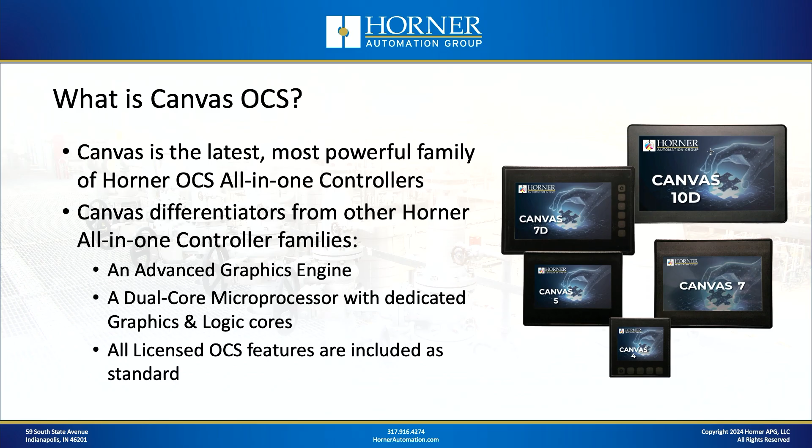Also, Canvas includes a lot of other features that might be available in other series, but you have to pay extra for those through a one-time upgrade, whereas they come included or pre-licensed in Canvas. So lots of additional features, and we're going to talk about those as we go. Okay, so why might you upgrade to Canvas? Well, first of all, it's priced very comparably to the original XL series and also to XL Prime. So you're not making a huge financial investment to upgrade to the latest and greatest.

Also, the basic upgrade procedure, which we're going to demonstrate for you today, is quite simple and really it's pretty low risk. Okay, there's testing involved, of course. You always test anytime you make changes in your machine logic. However, it is a quite simple process and we think you'll consider it pretty low risk. Also, the other reasons to upgrade are some of those included features. The superior graphics tools, the best graphics we offer in any OCS. If you're an IEC user, we have some enhancements to IEC that you could take advantage of. We'll talk about those a little bit later.

If you have never used WebMI and you want to take advantage of it, WebMI capability is built right into Canvas. If you happen to be an Ignition user or another user of software which interfaces with MQTT Sparkplug, which is kind of the latest industrial push protocol, Canvas has that protocol included. And maybe if you want to push data to the Horner cloud, Canvas supports that as well, having the ability to push to the OCS 360 cloud service built in, although you will still have to subscribe to one of the data plans with OCS 360.

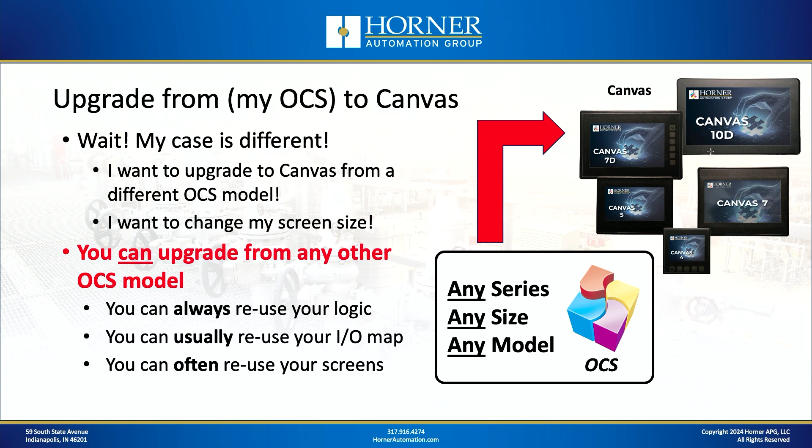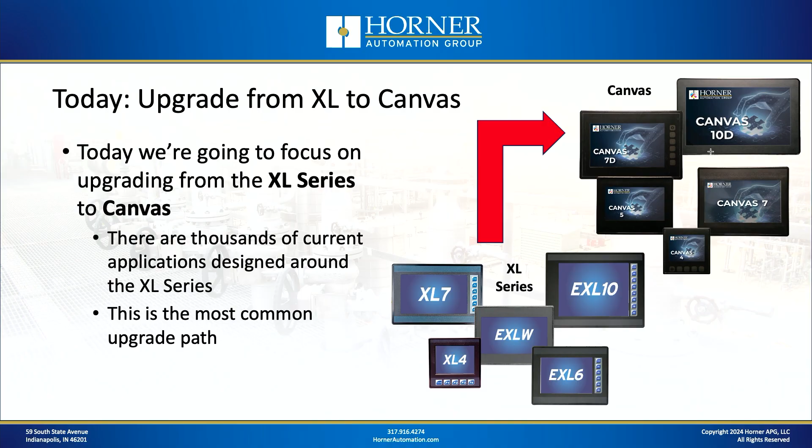So at Horner, we pride ourselves in giving our customers upgrade options, whether your machine is 5 years old or 25 years old. Okay, let's get back refocused on today's procedure, and that is upgrading from the XL series to Canvas. All right, the first step is to select a model.

Now on the left there, I'm showing you the most common models in the XL series: the XL4, EXL6, EXLW, XL7, and EXL10, all right? And on the right, I'm showing you the closest matches for those models in the Canvas series. Now you'll notice that 3 of them have really a direct correlation, a direct match. The sizes are the same, the pixel patterns are the same. So that's the XL4 to the Canvas 4, EXLW to the Canvas 7, and XL7 to the Canvas 7D.

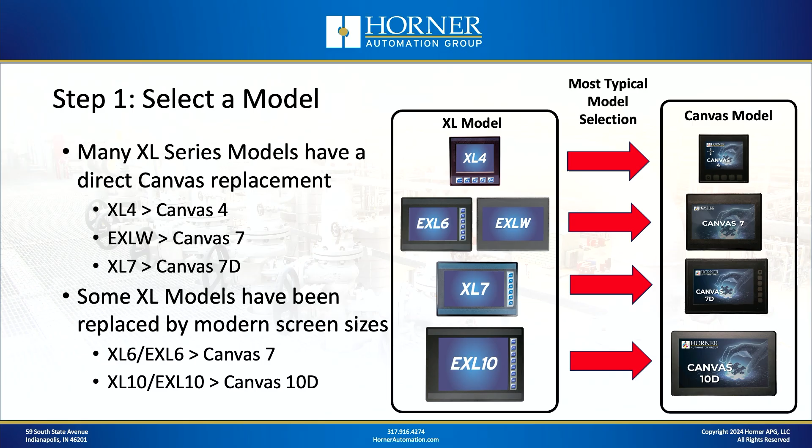And a couple of the models in the XL series don't have a direct representation, and that's because we've replaced the EXL6, for instance, with a traditional 7-inch model. And we've replaced the EXL10 with the Canvas 10D, which is a 10-inch unit, but it's widescreen with a different pixel pattern. Okay, now those, you can still overcome the fact that the pixels don't match exactly. We'll show you how that happens.

Okay, the next step is always to back up your file, right? The Cscape file you have that's running on your existing machine, you always want to make a copy of that before you start the upgrade procedure, always, okay? And then when you open that file in Cscape 10, you'll probably be prompted to back it up again, just because we think it's really important that you do that step. Always want to make sure you have options to go backwards if necessary, and that means having a secure original file.

Okay, the next step, because technically I guess this is step 3, but it's the first step within Cscape, is that you're going to just go to the hardware configuration and change from your current model over to the Canvas model. Okay, so you'll change series from, in this case, XL or XL Prime to Canvas, and then you'll go and select the size that you want.

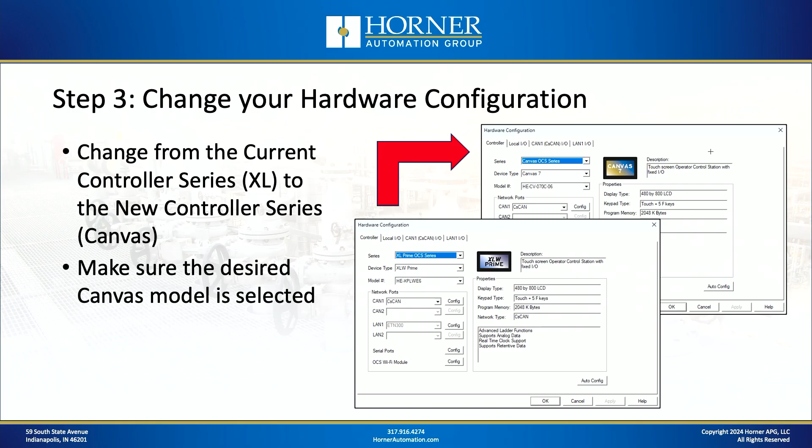Now, Cscape 10 will automatically select the direct replacement size if there is a direct replacement. If there isn't, for instance, going from an EXL6 to a Canvas 7, then you'll manually have to select the size and the device type in your hardware configuration.

Okay, now once you've done that, if you don't have a pixel for pixel match between your original XL unit and your Canvas unit, you will be prompted to basically tell Cscape if you want it to resize and reposition the objects on your screens. Okay, and generally I would say yes, you're usually going to be better off opting in for that. Otherwise, you probably will want to go through and manually change everything. And I would suggest allow Cscape to do its job, and then we can do some tweaking later. So once the conversion has been done, if it was needed, then we can do some tweaking.

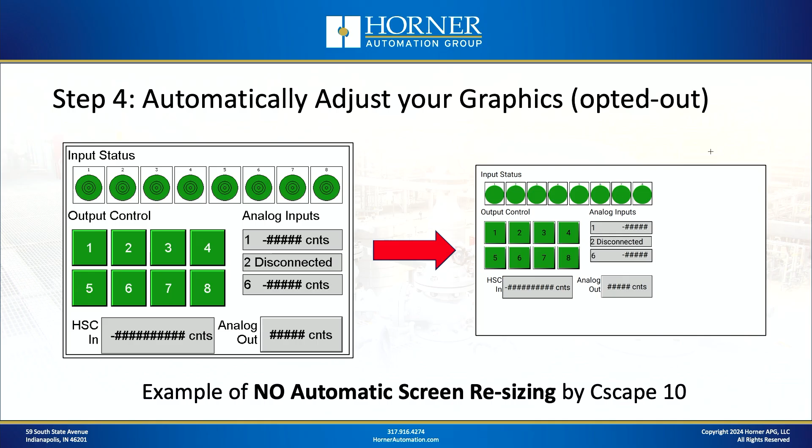Now, this is what things look like if you opt out of the conversion. On the left, I'm showing basically an EXL10 screen, and on the right I'm showing a Canvas 10D screen. And you can see there's a lot of white space there. That's because we didn't automatically resize and reposition. However, if we would have chosen the resize option by opting in, then you can see that things fill the screen, and while there's some tweaking that needs to be done, it looks pretty good.

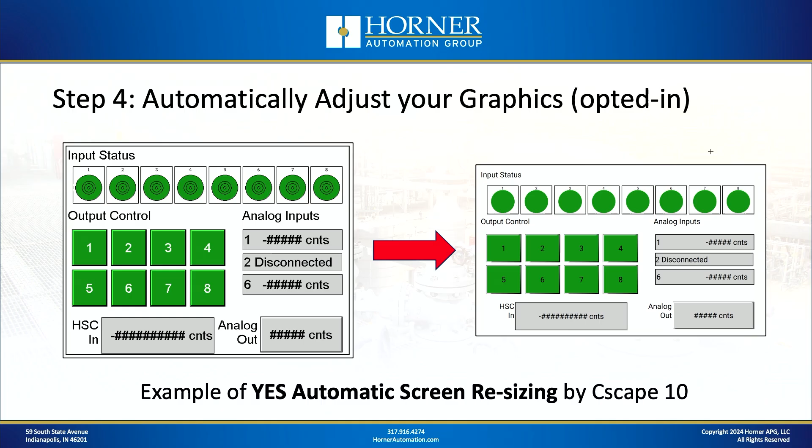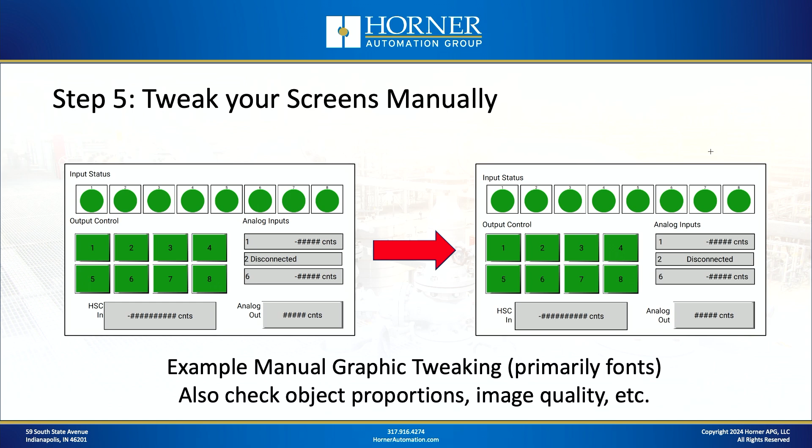And then on the next screen, I'm showing you the next step, which is to go through and tweak your screens manually. So for things that didn't exactly translate perfectly, you'll want to go through and just tweak things a little bit. It's only going to take you, on average, a minute or 2 per screen.

Now we get into the optional steps. So at this stage, we're pretty much done. If all you want to do is a basic conversion from XL Series over to Canvas, you are pretty much done. The next things we're going to talk about are all the different optional steps you can take if you choose, all right? The first one is to switch from register-based to variable-based advanced ladder.

Okay, if your program is already register-based and you're interested in converting it to variable-based, you can do that. Cscape 10 has a conversion option included inside the Project Navigator menu. So we're going to demonstrate that today. So you don't have to start from scratch if you want to go from register-based to variable-based.

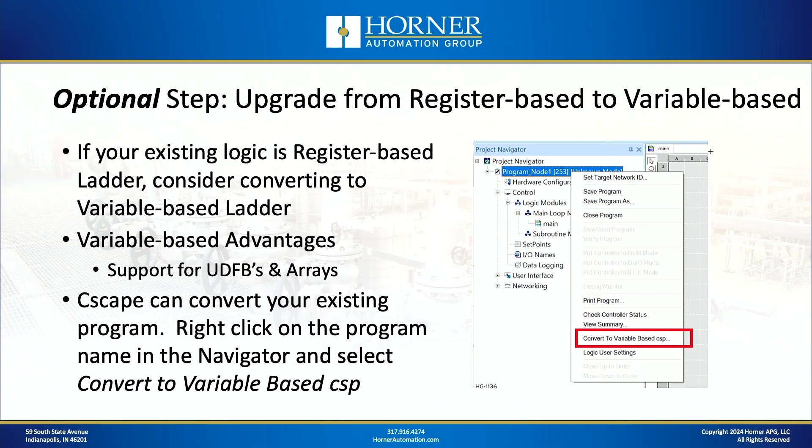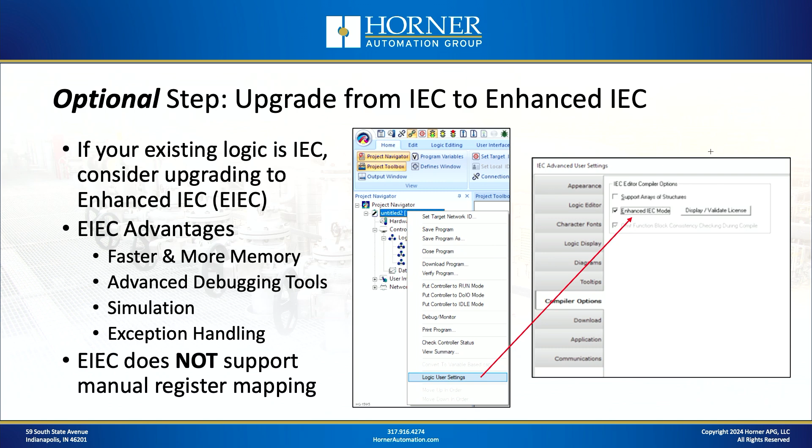The one thing to keep in mind is, if you've got an IEC program that's doing a lot of manual register mapping, that is not supported in Enhanced IEC. So you'll have to make program changes to overcome that manual memory mapping that you might be doing to do some programming shortcuts. So that's one little caveat I wanted to mention. So another optional upgrade there.

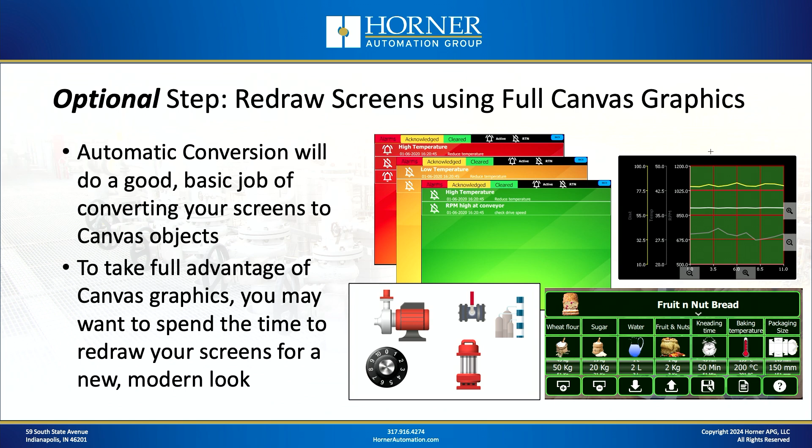Okay, another optional step is to fully take advantage of Canvas graphics by redrawing some of your screens, utilizing the advanced graphics capability with Canvas. That's a little more of an investment, right, to redraw your screens, but maybe it's not. Maybe you don't have that many screens, or maybe it's really important that you have a more modern look to your machine, so you're going to spend the effort to go ahead and redraw the screens. But at least, even though you're redrawing your screens, you're starting with your logic, which is a big deal.

The next optional step is to take advantage of WebMI. Maybe you didn't have the option of doing WebMI before with your XL Series product. If it's one of the original XL Series, that's absolutely true. And now you can use WebMI, all right? And it's included for free, right? So you can have full remote monitoring and remote control and take advantage of the WebMI license that's built right into Canvas.

The next optional step is using MQTT Sparkplug. And the reason you'd want to do that is if you happen to be using some industrial software that supports the ability to push data to that software via MQTT Sparkplug. And that, again, is a protocol that's built right into the Canvas OCS.

And then finally, taking advantage of OCS 360, okay? So with OCS 360, you can push data to the cloud, creating dashboards, alarms, and notifications. You can log that data for future use, whether it's AI, machine learning, or something of that nature in the future. And we're getting ready here later in 2025, actually this summer, to add remote access capability to OCS 360 as well. So you can remotely access your OCSs from Cscape to do troubleshooting and program changes and those sorts of things.

Now, even though support for OCS 360 is built into Canvas, you'll still have to subscribe to a data plan for each Canvas unit that you're going to use, and those start at $250 per year for 250 variables per minute. Quite a bit of data there. Next, we're going to demonstrate for you what an upgrade might look like from XL Series to Canvas.

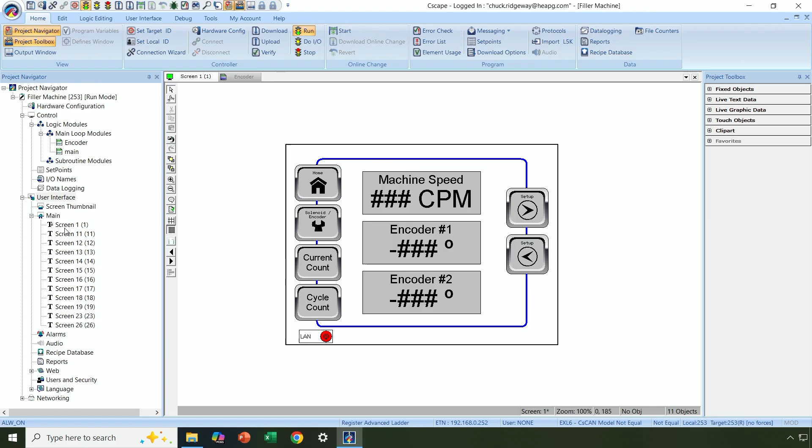Okay. So here's my program. You can see there are about a dozen screens or so that are part of this program, and there are a couple of logic routines as well. And you can also tell that it has been written in register-based logic.

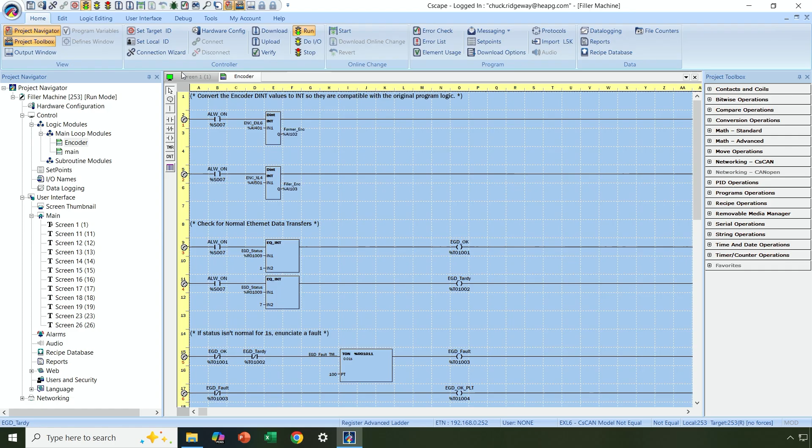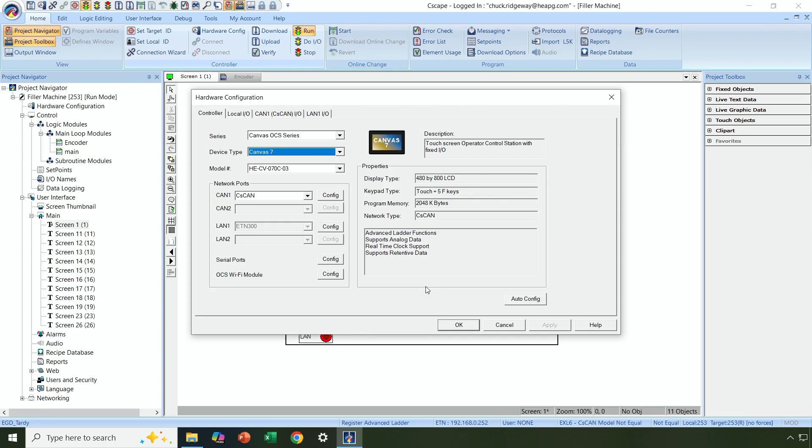All right, so the first thing we're going to do is upgrade to Canvas by changing the hardware configuration. So I go to hardware configuration. You can see it's on XL OCS series right now. We're going to switch this to Canvas. Now, after we switch to Canvas, the next step is to select the appropriate size that we want. The most direct conversion for the EXL6, which was a 640 by 480 5.7-inch display, would probably be the 7-inch model, or the Canvas 7. And we'll go ahead and select that. We'll hit OK.

So the next question that comes up is, do you want to resize and reposition the objects and their fonts proportionately? Yes or no? So this is where you decide, do I want it to resize things for me or not? I'm going to go ahead and say yes here. All right. And that's done.

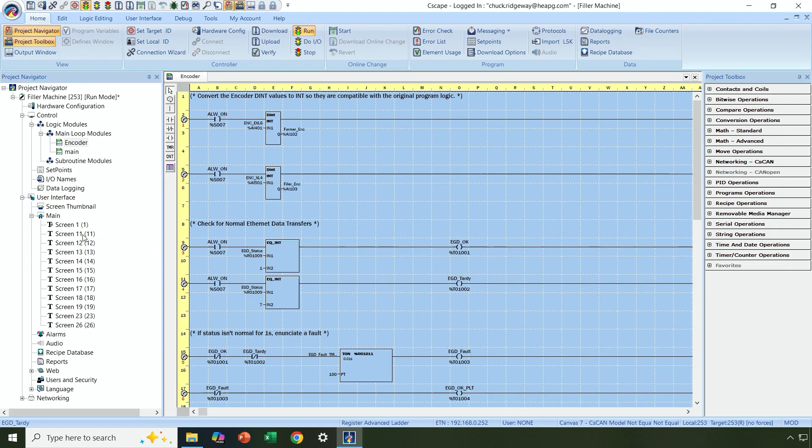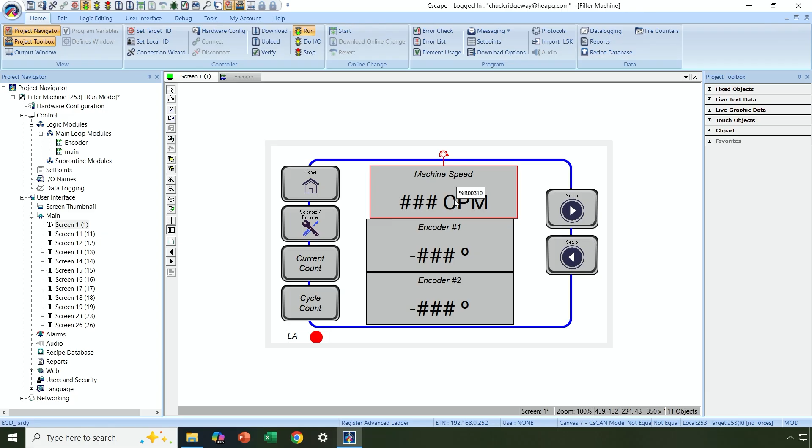Okay, and let's fix this one. All right, and let's fix this one. And I'll go ahead and stretch this one a little bit. All right, so that's much better. Now let's get them lined up here. All right, we're a little off on our sizing, probably because the grid settings were different on the last unit.

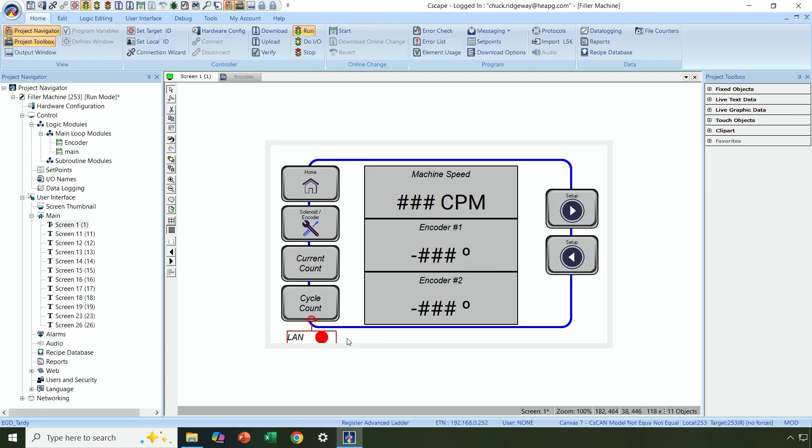So this is really just tweaking. It's not difficult, just a little bit of tweaking that you may need to do on some of your objects. And then this particular indicator here, the LAN part is cut off. So we needed to tweak that around a bit as well. So, you know, that took me a couple minutes to go through. Let's go to the next screen.

The next screen actually looks pretty good. We could choose to make that font bigger if we'd like. Again, we're going to have this LAN indicator on every screen, so that'll be something we'll want to change on every screen. But as you can see, it pretty much gets most of it right at the beginning. It's really just a matter of tweaking to get things to look just the way you want. And of course, we're not taking advantage of Canvas graphics here. We're just directly converting over to really basic data objects and those sorts of things.

So over the process of tweaking these screens, I would guess that on this project, and I'm not going to record the whole thing, it'll probably take me 15 minutes or so to go through and just clean things up so they look pretty decent for these dozen or so screens. So maybe a minute or so per screen. And that's pretty typical, I would say, for most conversions, maybe a minute or two per screen to clean things up. Okay, so the basic conversion is now done.

So we've taken our program, which was originally developed for an EXL6, and we've converted it over to a Canvas 7. It basically converted everything pretty much automatically. Of course, we had plenty of tweaking to do with the screens, which I demonstrated as well. Now, if we wish, there's lots of other upgrades we could perform. One would be to convert from register-based logic to variable-based logic. Well, how would we do that? We've got a whole video on that, but I'll at least show you the basics.

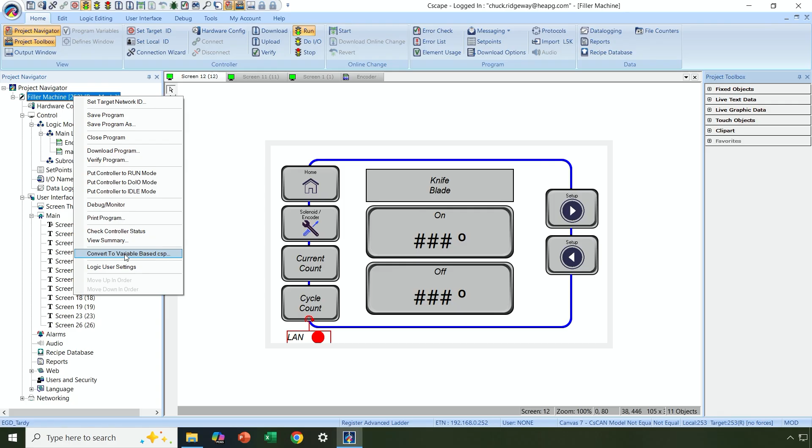So we're going to highlight in the navigator our program at the top level here. Right click, and down here we have convert to variable based. Press the start button. It asks for a name. So let's call this filler machine. It suggests a name. Filler machine VBAL is what I'm going to call this. I'll hit save. So it automatically saves it to a new name. And as you can see on the screen, it shows us its progress.

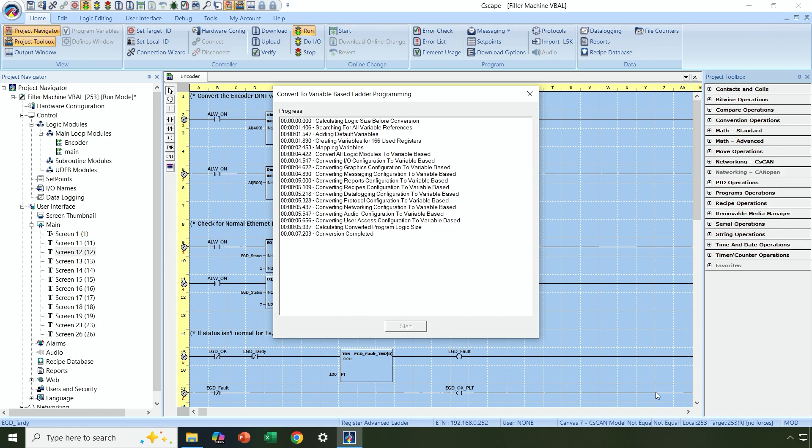Okay, and it tells us what the logic size was before and what the logic size was after. The big difference is it's created variable names, and that's now part of the program, so it's increased the program size. But there's still plenty of open space in the program.

Okay, so now if we look at this ladder logic here, you can see it's now variable based. Any registers which had IO names to them, their new variable name is whatever the IO name was. And if you didn't label the specific variable, you just left it as a register, then you're going to get kind of standardized variable names.

Let's take a quick look at that right now. I'm going to pull up the program variable table, the global variable table. As we scroll down here, you can see all these traditional variable names. But then when we go a little further, we can see for any variable that was not documented, that didn't have a corresponding IO name, it's going to create a default variable name for that.

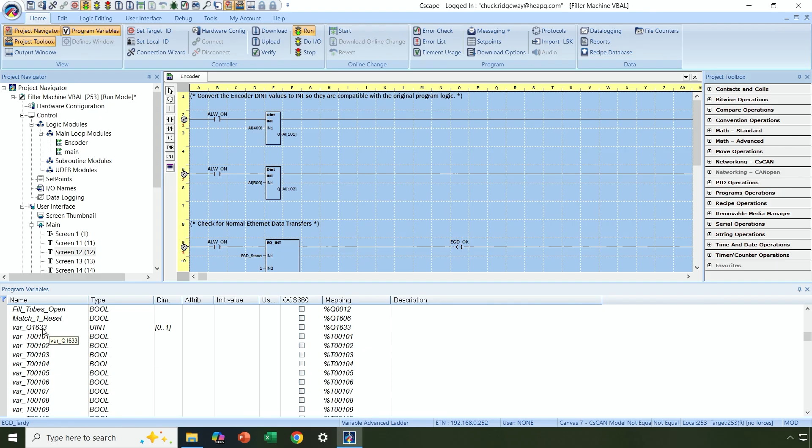We've got a whole video on doing conversions, but usually what I recommend is go through and make sure your program is very well documented. Name as many of those registers as you can before you go through the process and do the conversion. So that was an optional step that we selected to go to variable based.

And now from this point forward, if I were to modify this program, add variables, those sorts of things, I get the benefits of variable based programming. I can use arrays, I can just name variables without having to map every single one. Obviously, we've talked at length on this channel about the benefits of variable-based programming, both variable-based advanced ladder as well as IEC.